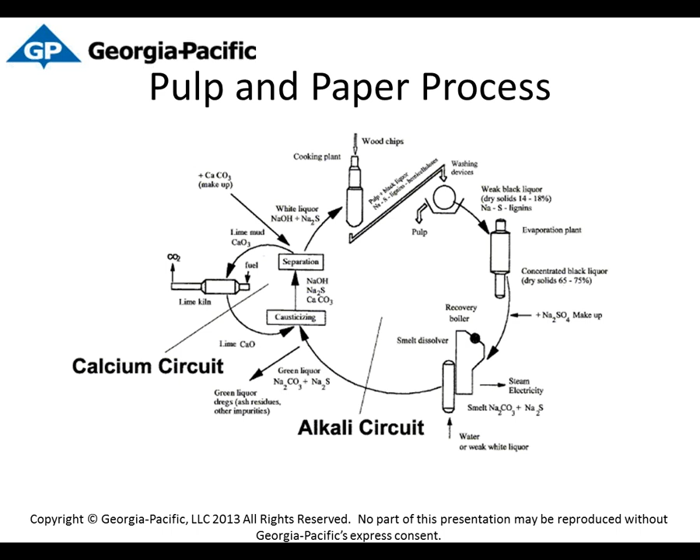So just a general introduction to corrosion. I'm not sure how familiar everyone is with it, but when you have a corrosion cell, there's two reactions that take place: the anodic reaction and the cathodic reaction. You can't have one without the other, and corrosion actually requires both of them. The slowest reaction of the two will govern the speed of the total corrosion reaction. So if you're anodic limited, the anode will limit the corrosion, and vice versa. If you're cathodic limited, the cathode will limit the speed of the reaction.

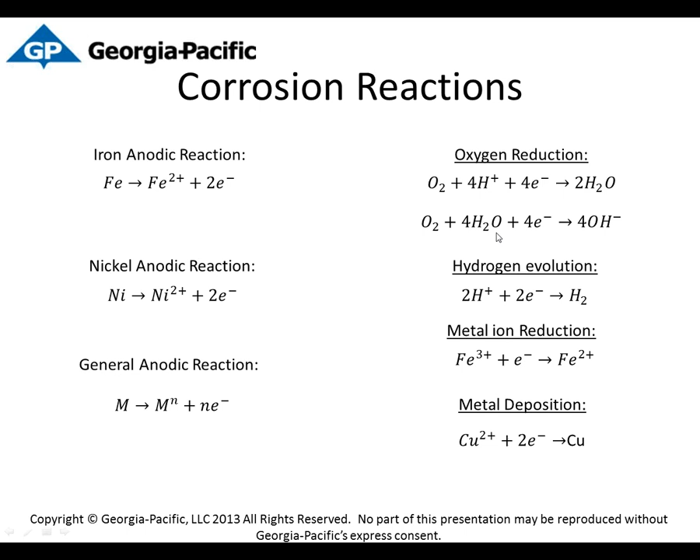So just again, another look at the corrosion reaction. If you have an iron bar and an electrolyte, the anode is giving off the iron ion. The electron is passing through the iron into the cathodic site. The electron can meet either a hydrogen or oxygen atom to complete one of these cathodic reactions, either oxygen reduction or hydrogen evolution, depending on the pH of the solution. That's just a real basic overview of a corrosion cell.

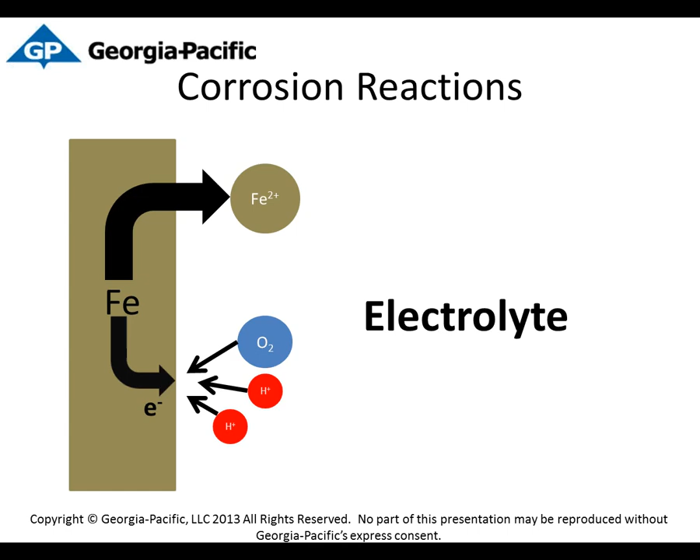And where this gets important is when we look at microbial influence corrosion, is that microbes are actually just changing this reaction. They change the kinetics of the reaction. They can change the speed of the reaction. They can change the corrosion product of the reaction. So that's really how the corrosion with microbes works, is they don't necessarily eat the material, eat the metal. They're just changing the existing corrosion reaction or corrosion mechanism.

So we're going to talk briefly about corrosion influencing factors, because really, like I said, these microbes are just influencing a corrosion reaction. One of those is a concentration cell. This is formed when a metal is exposed to an environment containing varying levels of electrolytes of either different substances or the same substance in different concentrations. That'll be enough to create a potential difference to drive that corrosion reaction.

Or an oxygen concentration cell is formed when there are differing amounts of oxygen reaching different parts of a metallic structure. Again, that can drive a potential difference and drive a corrosion reaction. And stress cells, formed when one area of metal is more mechanically stressed than another. The area of high stress is always the anode.

And the reason I picked out these three influencing factors is because these are commonly seen with MIC, microbial influence corrosion. A lot of stress cells can be on welds or welded joints if they're not properly stress relieved. But more importantly, oxygen concentration cells and concentration cells—bacteria can actually form these types of cells on the metal surface.

Specifically, oxygen concentration cells, where you can get very low areas of low oxygen concentration beneath the microbes on the pipe surface. That's particularly important when dealing with stainless steels, because the reason they're stainless is they have a very thin passive film formed by chromium oxide on the surface. And if there's no oxygen present to replenish that chromium oxide, it's easy for the steel beneath it to corrode.

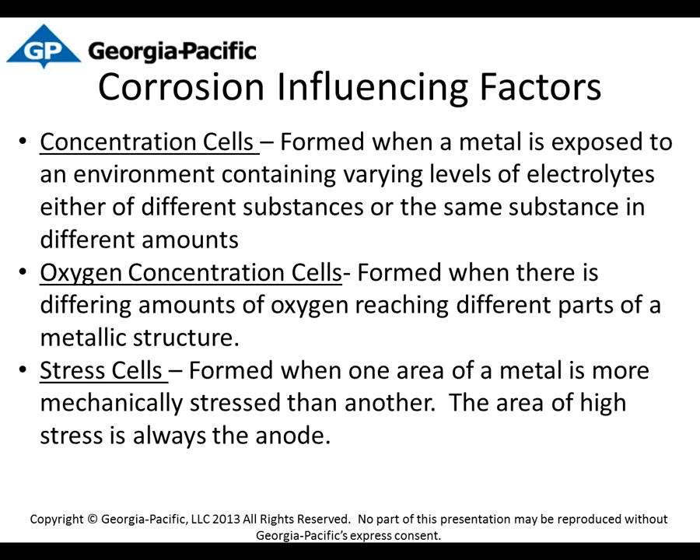So what is MIC? MIC refers to the influence of microorganisms on the kinetics of corrosion processes of a metal, caused by microorganisms adhering to the surface, usually called a biofilm. And usually in that biofilm is not just one microorganism, it's a whole community of microorganisms. In a lot of cases, they have a symbiotic relationship, using products of one species to feed another and vice versa.

Or a lot of times you have anaerobic bacteria living beneath aerobic bacteria. The anaerobic ones are in between the aerobic bacteria and the metal surface, in that low oxygen environment. So the term microbiologically influenced corrosion is used to designate corrosion due to the presence and activities of microorganisms. That is, organisms that cannot be seen individually with the unaided human eye, including microalgae, bacteria, and fungi. Microorganisms can accelerate rates of partial reactions in corrosion processes, or shift the mechanism for corrosion.

So these organisms in and of themselves don't eat the material or eat the metal. They just accelerate rates of partial reactions. They can accelerate the anodic reaction or the cathodic reaction. One of those cathodic reactions we saw was hydrogen evolution. So some microbes, like methanogens, will actually take that hydrogen and pull it away from the surface, allowing the rate of the cathodic reaction to increase, which can drive the corrosion reaction faster. So microorganisms do not produce unique types of corrosion. Instead, they produce localized attack, including pitting, dealloying, enhanced erosion corrosion, enhanced galvanic corrosion, stress corrosion cracking, and hydrogen embrittlement.

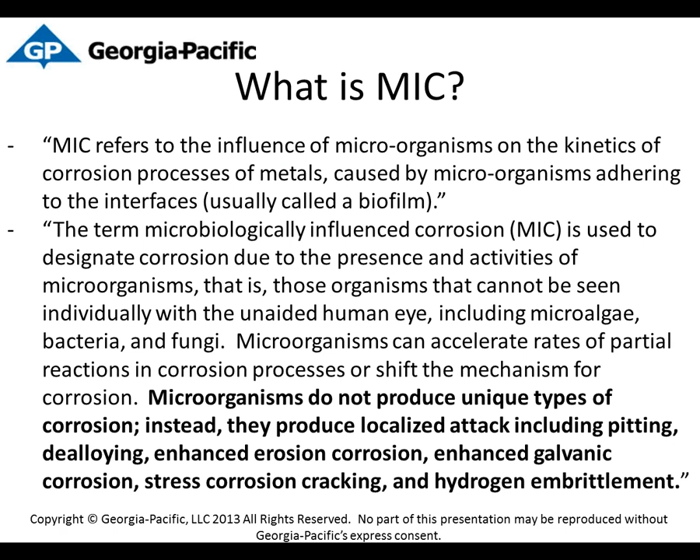So what we need to have MIC: you've got to have an energy source, a carbon source, an electron acceptor, and water. And since this is one of the most water-intensive industrial processes, we've got plenty of water. A carbon source and energy source, we've got both of those too. We've got a lot of organics in our process just by default, since we're taking organic material and converting it to paper. So we've got all the carbon and energy we need, and we've got the electron acceptor. We're in the perfect environment for MIC, actually, in the pulp and paper process.

So like I said, in the early days, we just saw leaks on piping, and we didn't really know what we had. So I'm going to walk through several pictures of the symptoms we saw, just to give you an idea of what we were looking at, and our thought process of identifying MIC.

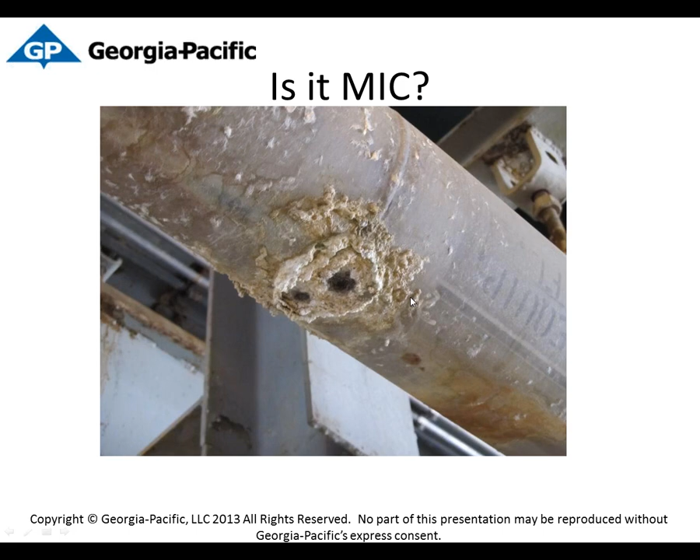So we walked through a mill, and this is a 304 stainless steel water line, 150-degree hot water, and you'd see something on the bottom of it that looked like this. You see what appears to be a leak in the bottom of the pipe. You start walking that line, and it looks like almost every welded connection on the bottom of the pipe shows some form or sign of corrosion.

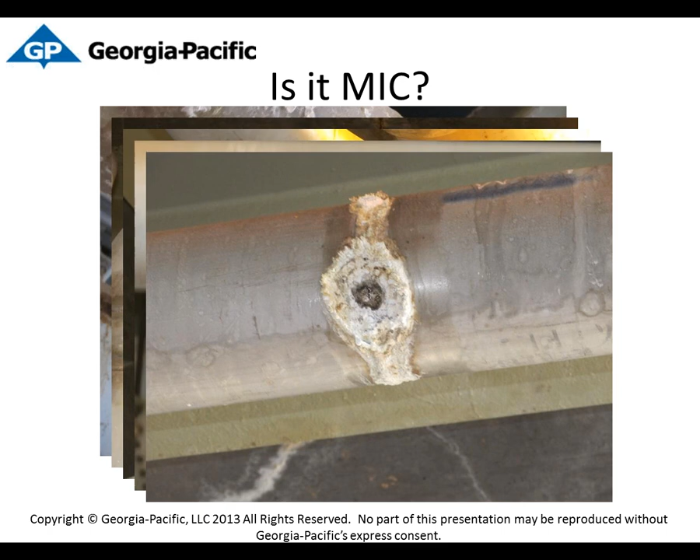We think, well, surely when this pipeline was installed, we didn't have bad welds on every single joint of piping. So there must be something else going on there. And on occasion, you would actually even see it in the stream of the piping, not on a welded joint. So we said, we don't know what that is. We don't think we had bad welds, but we're actually starting to suspect MIC.

Well, then in industry, we have to wait until an outage of some sort where this line can be isolated before we can pull a sample. So it wasn't until about 6 months later, after we first noticed the corrosion on the bottom side of the piping, that we actually were able to pull a sample out of that hot water piping. And this is what we found.

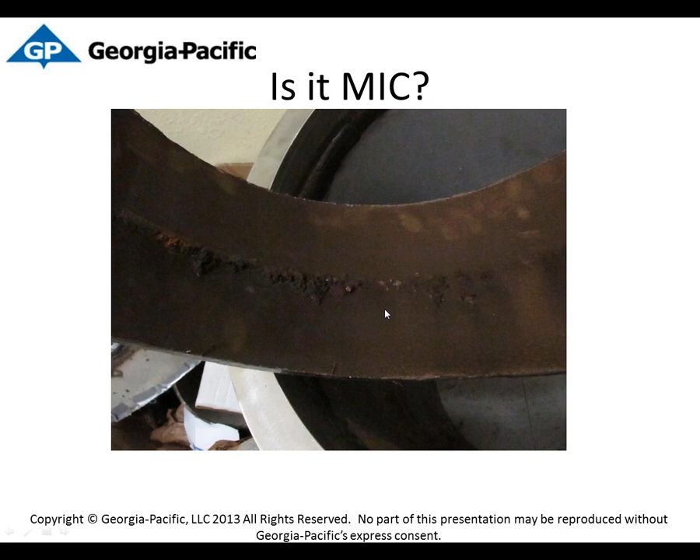Actually, tubercles were going all along the bottom of the piping, and here are some close-up pictures of what they looked like. So at this point in time, we're still not 100% sure if we had MIC or not. And being fortunate enough to have several veterans of the company working there, who'd been there 20, 30 years...

This site in particular had a history of poor water quality, with high manganese in the water. And actually, to have high manganese in the water, it doesn't take but about 20 to 30 parts per billion, and they consider that pretty high for manganese. So we knew we had high manganese in the history, but we thought we remedied the problem.

So what we started to look for were manganese oxidizing bacteria, one of the first things we looked for. And with Microbial Insights' help and Dora's help, we actually found that we tested positive for the manganese oxidizing bacteria. We also tested positive for sulfate-reducing bacteria.

And with sulfate-reducing bacteria, it's a common misconception that if you do any research on MIC, or hear anybody in industry talk about it, everyone immediately jumps to SRBs or SOBs, sulfate-reducing bacteria or sulfur-oxidizing bacteria. Everybody jumps to those two because they can, through their environment, create H2S and sulfuric acid. So everybody thinks that's the most corrosive, and if you don't see either of those species, you don't actually have MIC and aren't getting corrosion. Well, we found that to be completely false.

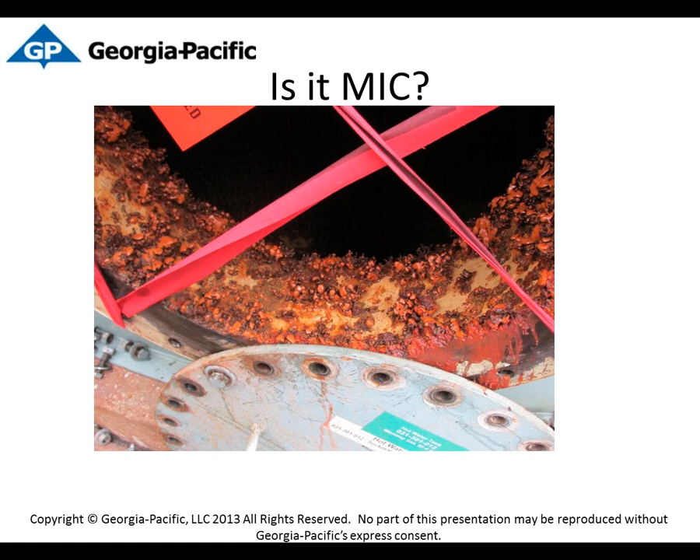As you can see from some of these pictures, this tank was completely covered in tubercles from the floor to the ceiling. And again, this is just hot water - 150-degree hot water.

When we actually did the inspection of this tank, these tubercles over the past five or six years had made quarter-inch pits on this half-inch thick plate wall. So we've gone through about half the tank life, in a matter of about six years, due to the tubercles growing on the wall.

We sent those samples to Dora, actually two samples. It's kind of ironic that the water right above the tubercles, but water still sitting in the bottom of the tank, tested differently from the tubercles - didn't expect that. We found manganese oxidizing bacteria in the tubercles. In the water, we found traces of sulfate-reducing bacteria and methanogens, but in the actual colonies it was mostly methanogen and manganese oxidizing bacteria.

Once we got Dora more involved in our systems - months and months after we first recognized we had MIC - we started looking into more species as we learned about the system, checking what's present in each part. The biggest shock was the fermenters, the big blue bar you see there. In the hot water tank we have an extremely high concentration of fermenters compared to the hot water system, and almost non-existent in the cold water system. So although all three systems are fed by the same water, there are strikingly different concentrations of bacteria in each.

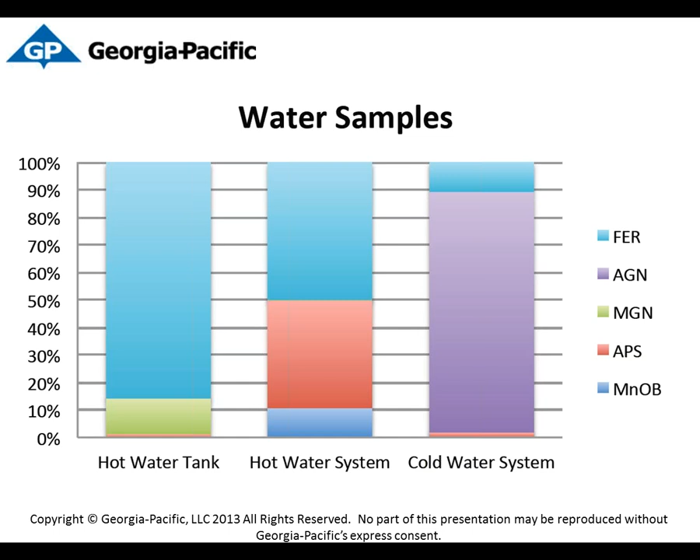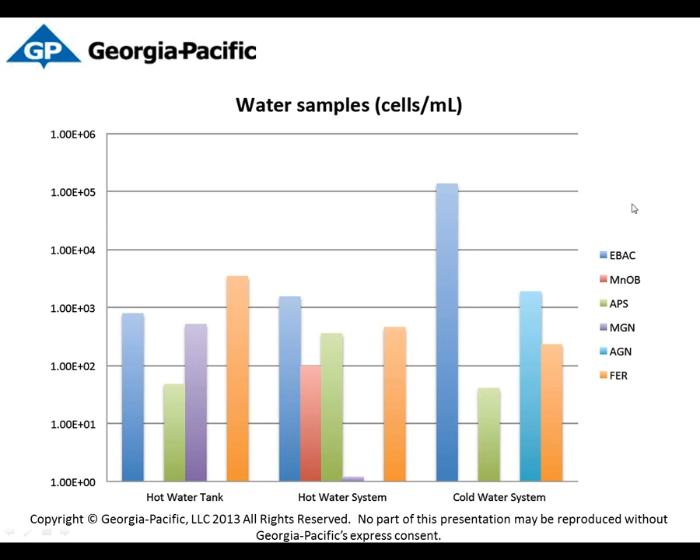This is another chart showing the bacterial count in each system. Obviously the cold water system would have the most, because it's the most favorable environment. Some of the different scrapings show slightly different results - scraping off the hot water piping walls versus the hot water tank floor showed some differences in bacterial counts, just slightly different environments there.

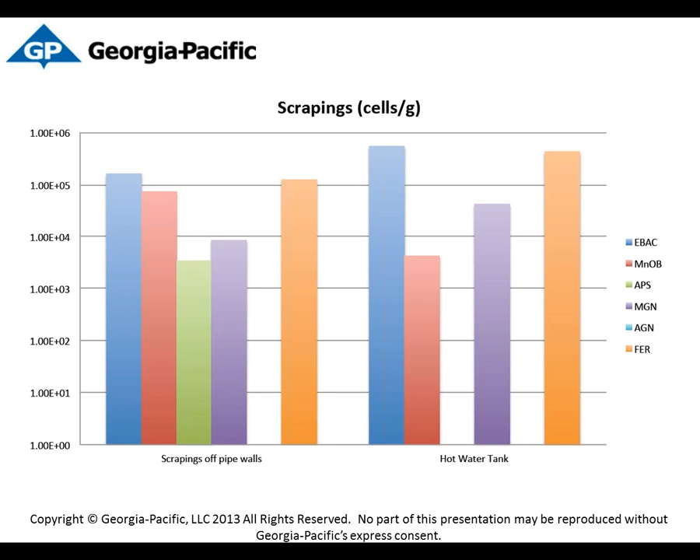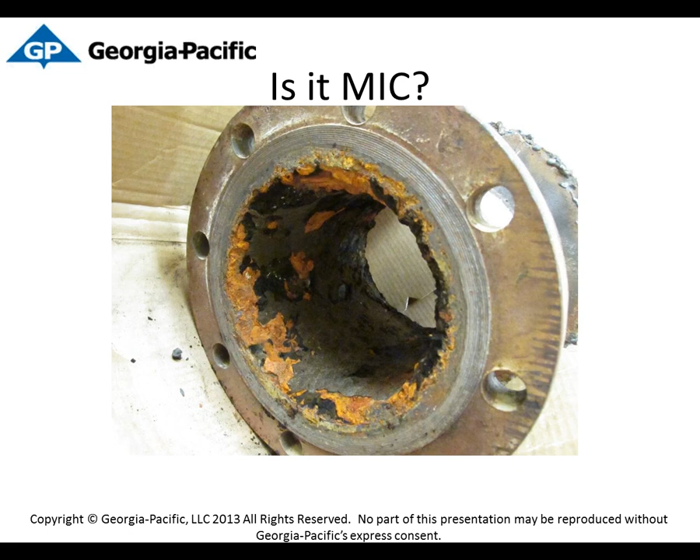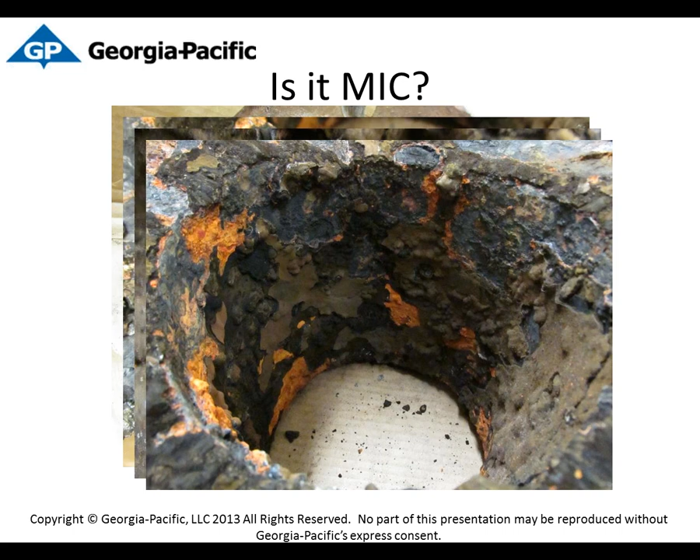As we learned more about it, we started looking for it in other mills. This is a sample from another southeastern mill, and when we first got it, the average person would look at this and say this is under-deposit corrosion - pretty typical, organics and inorganics in the water caking up on the pipe wall, causing corrosion. We said, well, does MIC play a role in this? Most people said no. We said, well, possibly - what about slime formers or anything else? Bacteria that can form on the wall can actually create the surface conditions that allow inorganics to adhere to the wall.

So we sent a sample to Dora, and we actually came back with several species of bacteria that were found. We never did any actual quantitative analysis on it, but qualitatively we did find bacterial species growing on the walls in that water system also.

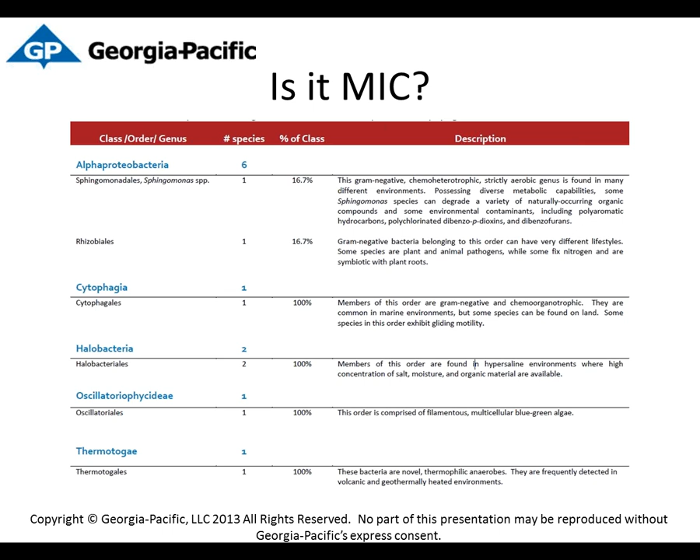When we installed this piping and specified this grade for the chlorine dioxide or bleach filtrate environment, within months of installing the piping we noticed it was leaking. It shocked us, and it happened in multiple locations, particularly at the weld. We kept wondering what was going on.

We'd done quality control on the welding, so we know it's not bad welding. We cut welds out and looked at them, and they looked fine. So we were wondering what's going on. Why is our pipe leaking?

So this is, like I said, 6 moly stainless steel. If you actually read Brenda Little, who works I believe at the Stennis Center and does naval research on microbially influenced corrosion - she wrote a book called Microbiologically Influenced Corrosion - she says that MIC on 6 moly stainless steel, just like this pipe in front of you, has never been reported. This really made us scratch our heads. We're reading the experts on MIC, the PhDs who do this for a living, and they hadn't really observed what we're observing.

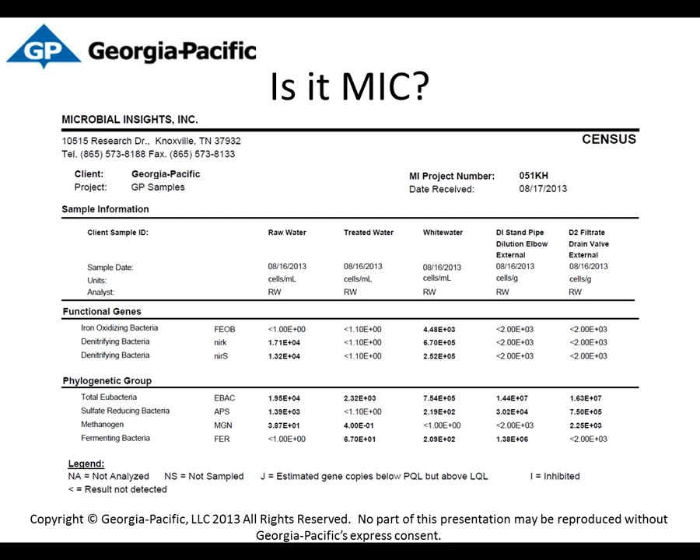Black liquor is a chemical we use in the pulp and paper industry - it's a byproduct of cooking I talked about earlier. It's that sodium hydroxide, sodium sulfide, sodium thiosulfate, sodium sulfide, and a lot of organic material. We actually see MIC in that, and that can be anywhere from 140 to 180 degrees. We've actually seen it inside the tank systems there. So it doesn't really matter the environment - we still seem to find it, detect it, and it just causes us headaches.

This was one of the latest mills. This was actually not technically a Kraft pulp and paper mill - it's a recycle mill. The big difference is they don't have the wood inlet or the digester and the cooking chemicals of sodium hydroxide and sodium sulfide. This one takes recycled paper, bleaches it, and turns it into another consumer product.

Dora actually made a trip up to this mill to look at some of the systems to help us identify the species of bacteria that were there, and help us come up with process remediation, what biocides to use, what we can do to treat this, because it was a very extensive problem.

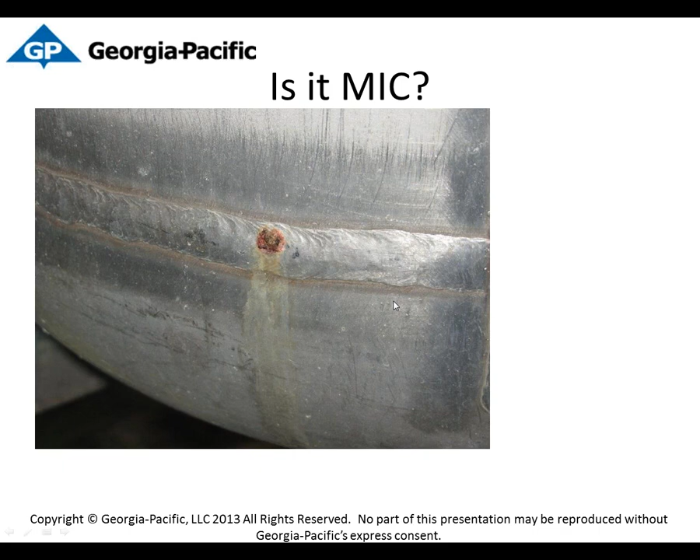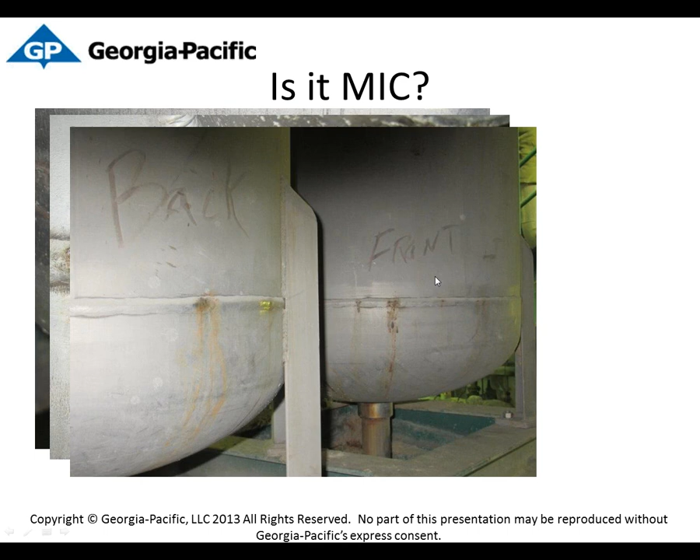Again, this is the same symptoms we see a lot, like our piping systems - we see the same things on our tanks. It doesn't really matter what the mill is or what the process is, it's always the same symptom: something on the weld line of a tank or a piping system starts to show signs of very, very small leaks.

And then once we get on the inside of the piping system, you can see where tubercles have grown all along the weld line.

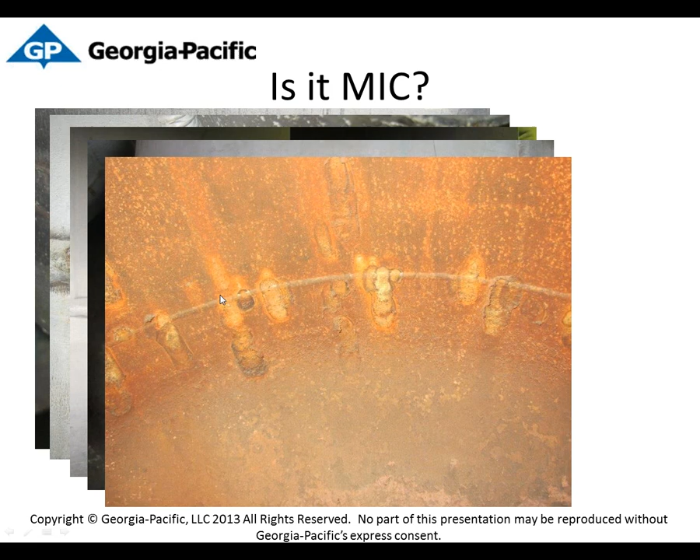This one actually is on these tanks here, on a paper machine involving white water and stock, and things. So it's 140 degrees, it's got plenty of pulp and organics in there for the bacteria to feed off of. But still, it's somewhat of a harsh environment when you think about the temperature, the chemicals, the bleaches that may have been added, and biocides that are added to the paper machine - you wouldn't expect to find bacteria growing on your vessel walls.

You wouldn't expect to find bacteria growing on your vessel walls.

So here's the bacteria reports we actually got from Microbial Insights, and these were actually some of the highest concentrations we found across the company to date - as far as the sulfate-reducing bacteria present in high concentrations, along with methanogens and fermenting bacteria. And like I said, this was another vessel that was only there for about 6 to 8 months, and we started to see signs of corrosion on a vessel you'd expect to last 20 years with no problems.

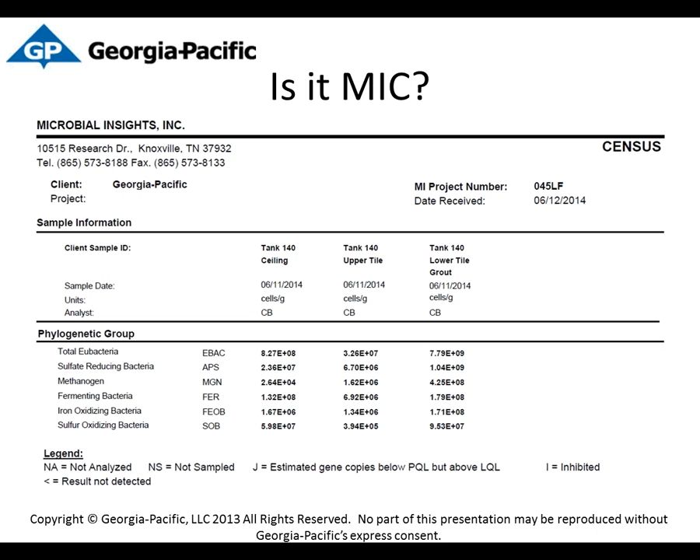So that's a really quick overview of some of the problems we've seen inside the company. I know I've skipped over a lot of information very quickly, just in the interest of time - I know we've only got about an hour plus questions and things, so sorry if I went through that quickly.

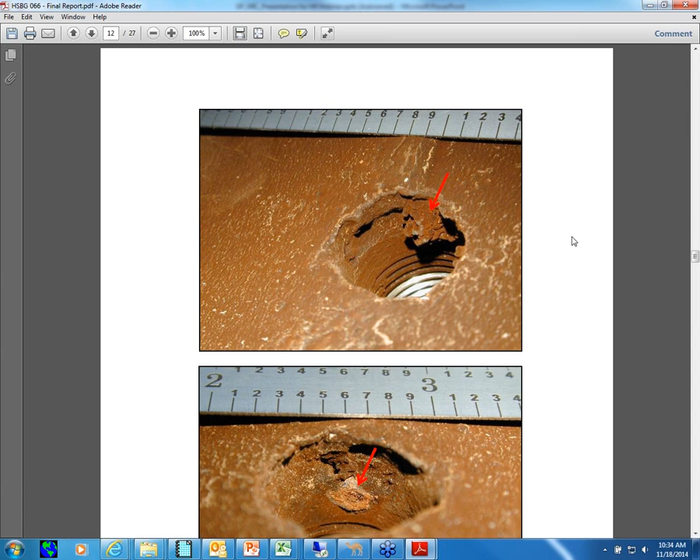But there's also, I wanted to show some metallurgical reports, because like I said, in the early days we had early stages of identifying the problem. We had a lot of problems just trying to identify what we actually had.

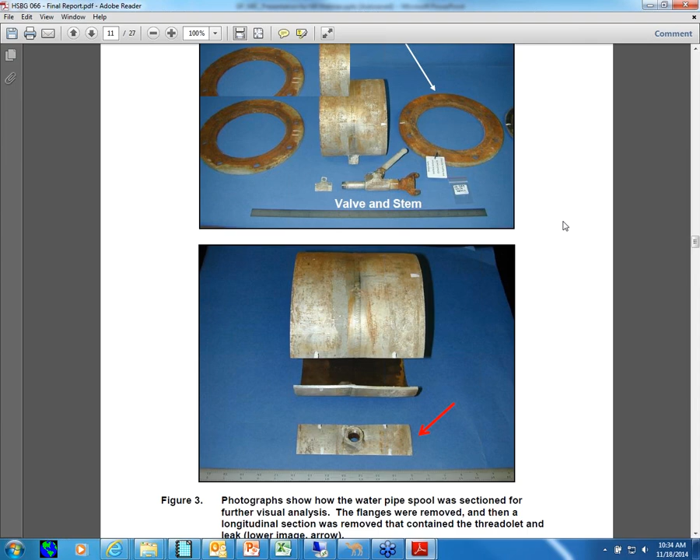So this is a picture of a piping spool piece that came out of one of the mills in the hot water system, and we were trying to identify if we had MIC or not. So what we actually saw was a spool piece that had a leak on it on the weld, just like we saw in all the other cases. We had a chance to remove this one without an outage, so we could plan and do it anytime we wanted to. That's why we pulled this sample out of the line.

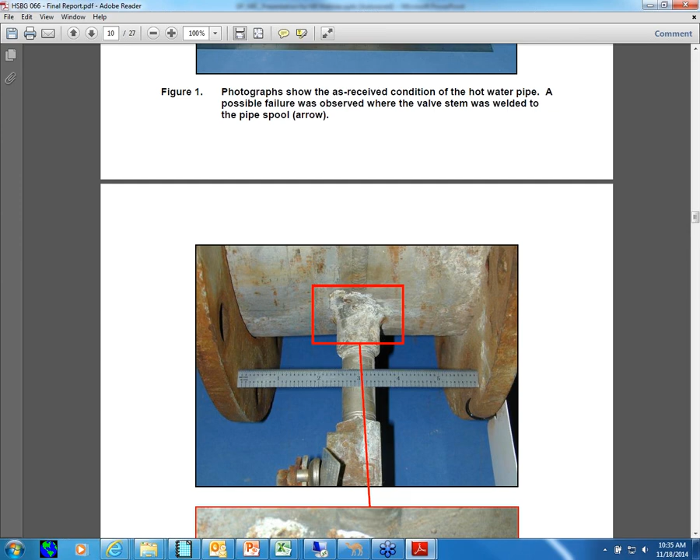It seems small and irrelevant, but it's actually one of the keys to us finding the solution to our problem. So we pulled the sample out of the line - this is all we could see from the outside, but we assumed we might have MIC there. So we sent it for metallurgical analysis, and they pulled it apart, cut it up, and this is actually what they found: one little tubercle growing on the inside.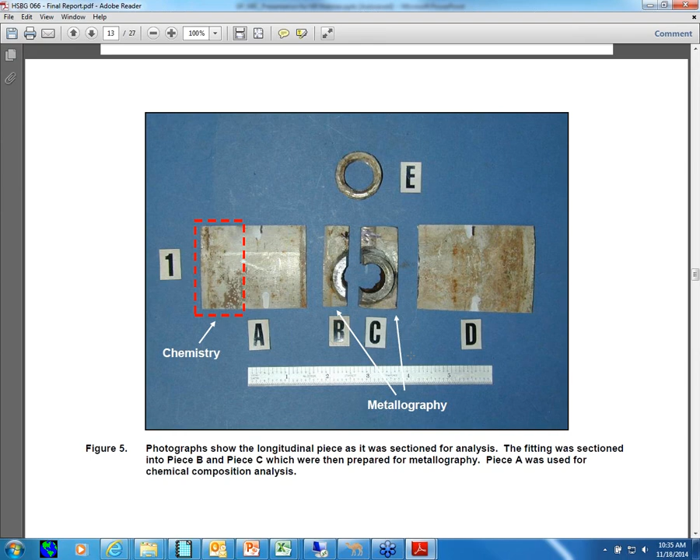When we did metallurgical analysis on it, this is what the microstructure looked like. This is what kept throwing everyone for a loop - we'd do a metallurgical analysis and find something that looked a lot like chloride stress corrosion cracking. So everyone would come back and tell us, you've got chloride problems, you've got stress corrosion cracking.

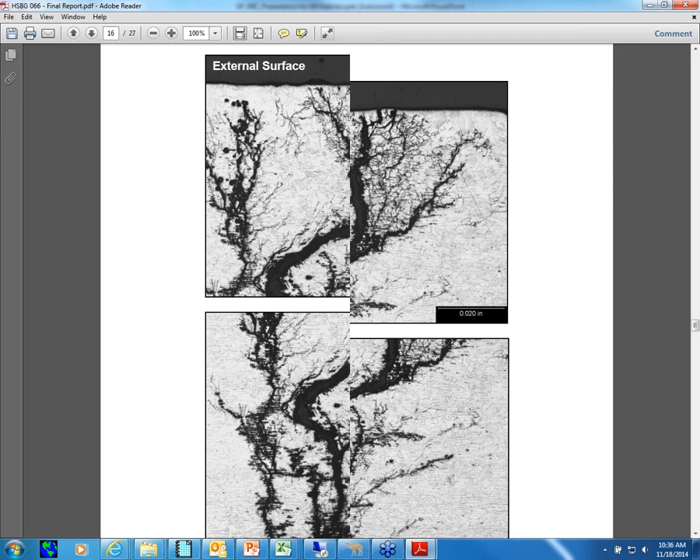This isn't MIC, they'd say, this is just some kind of underdeposit corrosion. But what you find if you read more in depth into the literature, especially with manganese oxidizing bacteria, is that the bacteria actually create a very low pH environment and attract chlorides to it. They form heavy metal chlorides in that environment, even though the base water outside the microbial colony is extremely low in chlorides, like 13 parts per million. You can get extremely high concentrations of chlorides beneath the tubercle and actually cause the corrosion you see in the picture.

This is a 304 stainless steel spool piece, generally rated for a couple hundred parts per million of chlorides in a 100 to 150 degree environment. We're in a 13 ppm chloride environment with 150 degree hot water - we'd say we should be fine, we shouldn't expect to see any corrosion, but we do. That goes to show how that microbe changed the conditions beneath its colony in such a manner that it would corrode the metal surface.

That was one of the stumbling blocks for us in the early days as we were learning about microbial influence corrosion and how it worked - that although it looked a lot like chloride stress corrosion cracking, the root cause would actually be the microbes growing on the surface.

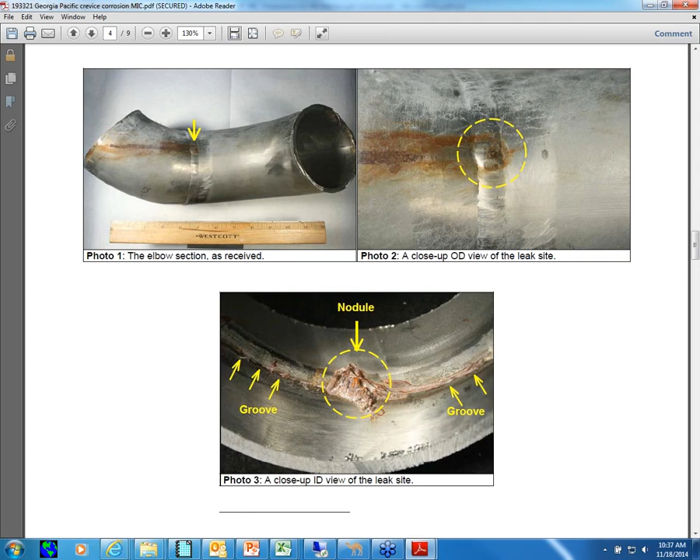I've got one more analysis to show. This one is the AL6XN, the 6-moly super austenitic stainless steel. This would be where we see a leak in a pipe and wonder what's going on. We send it out for metallurgical analysis, and they could actually see the nodule, but what they found was actually a poor weld - a lack of root penetration welding.

So these guys came back and told us, your problem isn't MIC and your problem isn't chlorides, your problem is you had poor welding. We say in most cases we actually X-rayed and did a lot of quality control, so we know it's not poor welding, so it's got to be something else. Poor welding didn't help the situation, but it surely wasn't the root cause of the corrosion we're seeing in the piping.

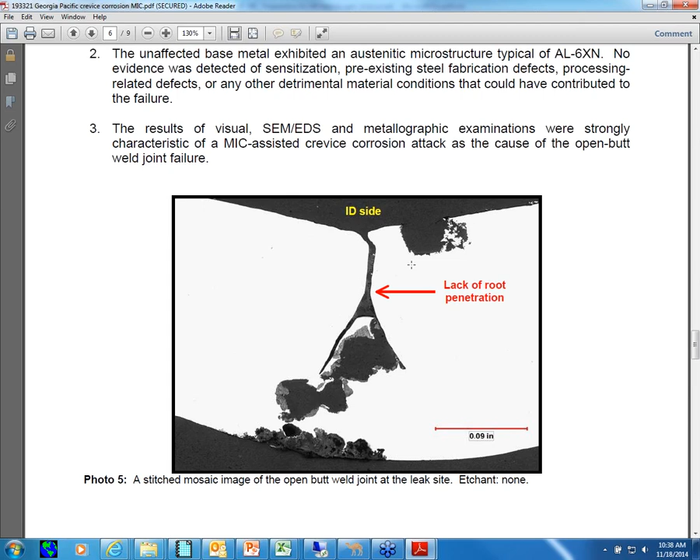For those not familiar with welding, this would be a butt weld - one piece here and one piece here. You lay a root in here, then fill the weld out to the surface of the piping system. This is the inside diameter of the pipe, and this is the outside diameter. What you see here is where the metals actually did not fuse together - they form a little crevice, causing crevice corrosion.

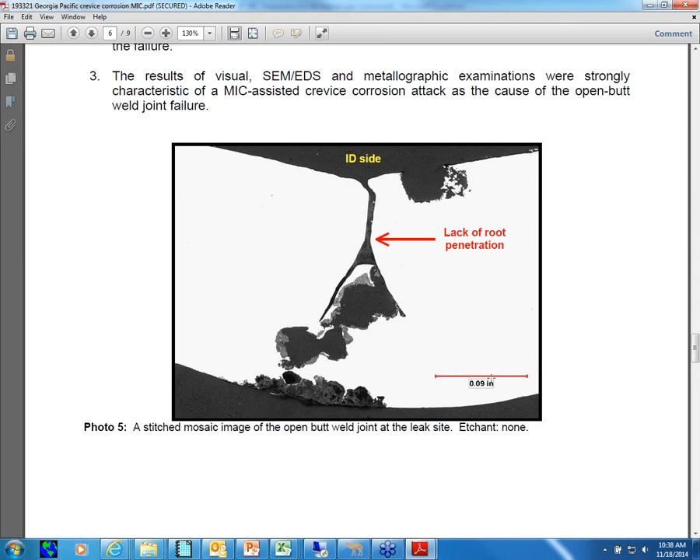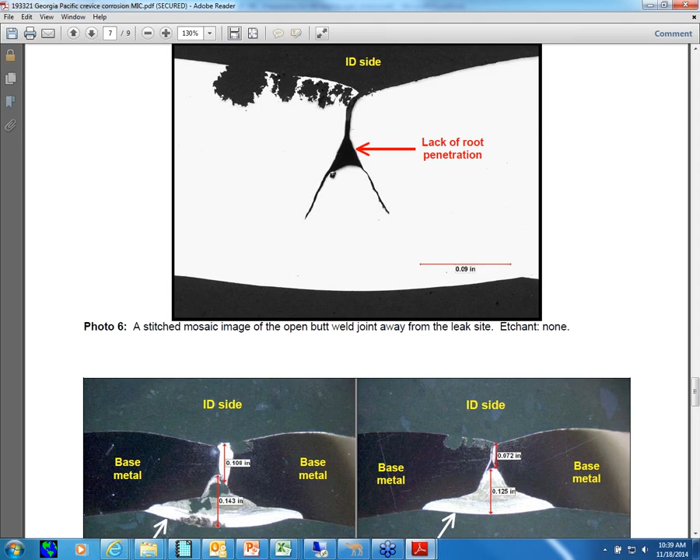So that's what this company came back and said - oh, you've got crevice corrosion, just because they found poor welding. Even though the poor welding was true, this crevice corrosion didn't cause the pitting over here. We actually still had microbes growing on the inside of the piping surface.

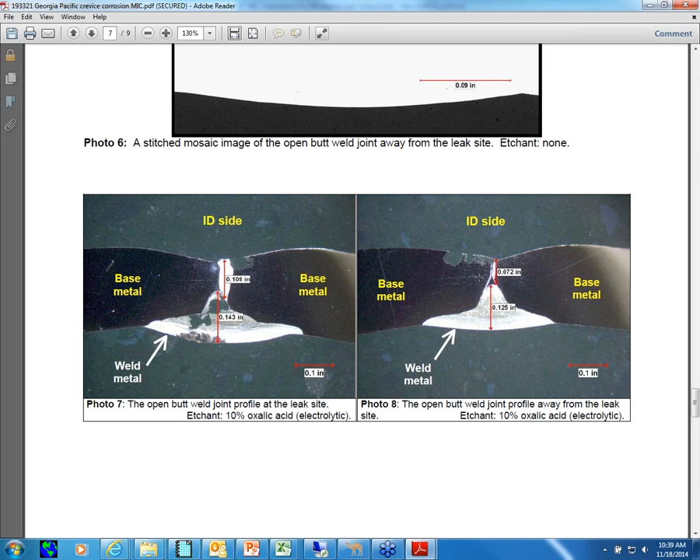I know that was a very quick overview of some of the problems we've seen and some of the microbes we've run into, in a very basic overview of pulp and paper process and corrosion. But with that, I was just going to open the floor for questions, because really we're still learning about microbial influence corrosion, just like I'm sure those of you on the call are learning about it too. We are by no means experts in it, but are still learning and welcome any help or advice from anyone out there in the field.